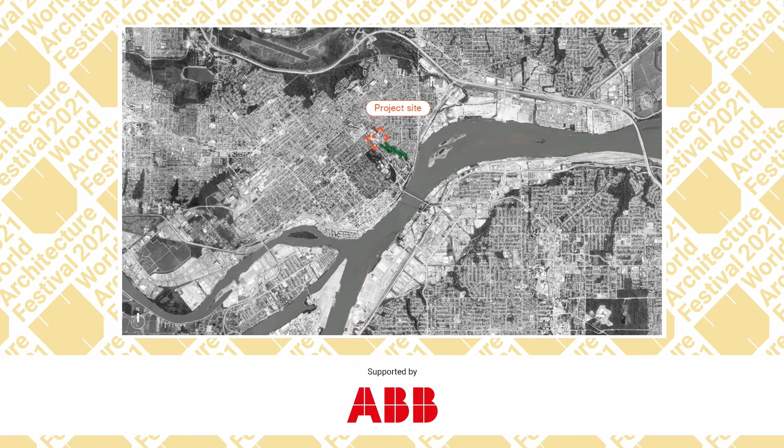The site here, you can see, is located on what was formerly a very significant land feature in the city of New Westminster called the Glenbrook Ravine, and that's just up from the Fraser River. And I say formerly notable, because as you can see here from these images, over the last 40, 50 years, that ravine was actually largely backfilled with garbage and leveled off and almost completely deleted from the landscape. And so our site is on the former headwaters of that ravine.

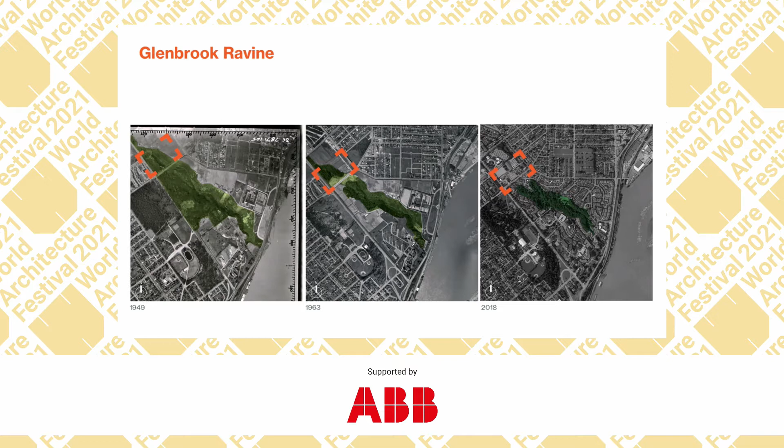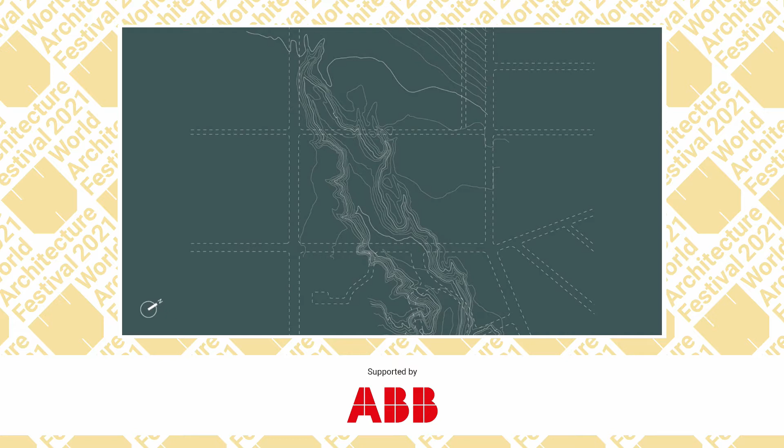You can see here the original topography that ran through the site that was largely leveled off and filled in. And then the urban or colonial structure of street networks and the urban grid that then surrounded it. And that urban grid notably is not oriented cardinal north-south, but it's on a slight skew to that. And so we took the position from a design standpoint that the building should take an attitude to this. And we took it off of the urban grid and oriented it primarily to that original topography as a way of reconstituting a deeper relationship with context and with the land.

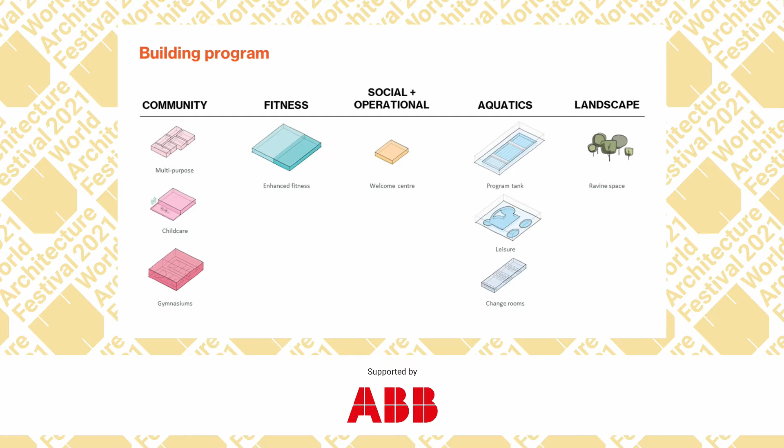So the building program itself is varied. It has both dry and wet programming. There's childcare, gymnasiums, multi-purpose spaces, and then a complement of both competitive and leisure-focused swimming. We started by iterating, trying to find a form that was comfortable for the site and unlocked the potential of both the site and its context.

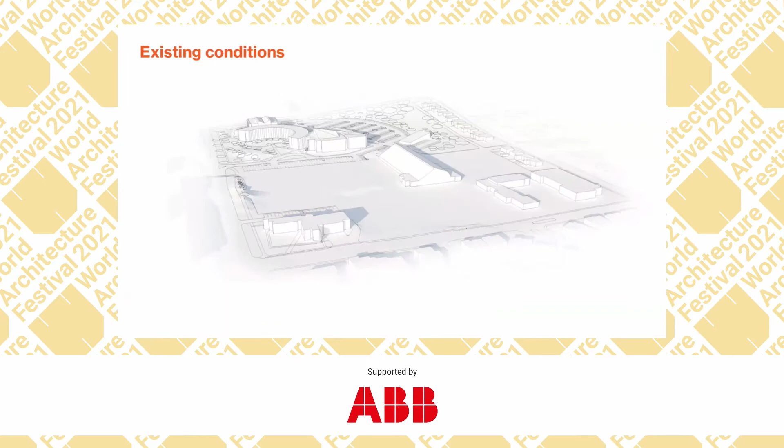And it wasn't an easy site. There's two existing buildings here highlighted in pink that needed to remain operational during the course of construction. And then the red dashed line here is a major sanitary line that runs through the site, and we couldn't build over top of that. And so the major design challenge here was creating an architecture that was intentional and had meaning, and that was not just the resultant of a series of difficult site constraints.

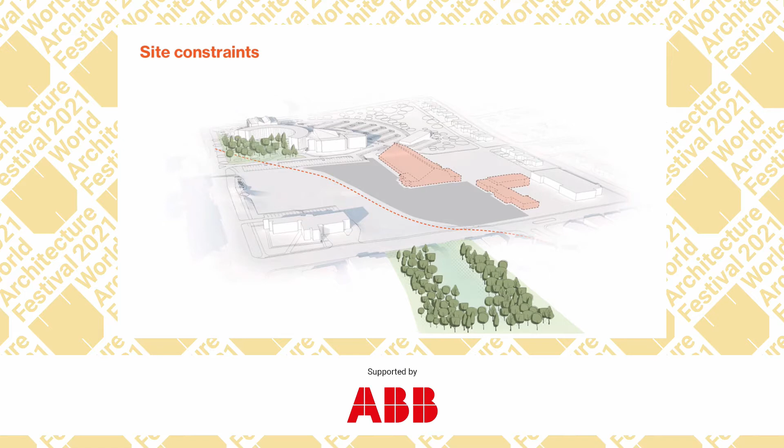So we started by using that sanitary line as an excuse to reconstitute the ravine. Not topographically, but as a major urban public realm piece that connected the vestiges of that ravine on both sides of the site and really allowed for a new site orientation and a site circulation and brought back the memory of that ravine space.

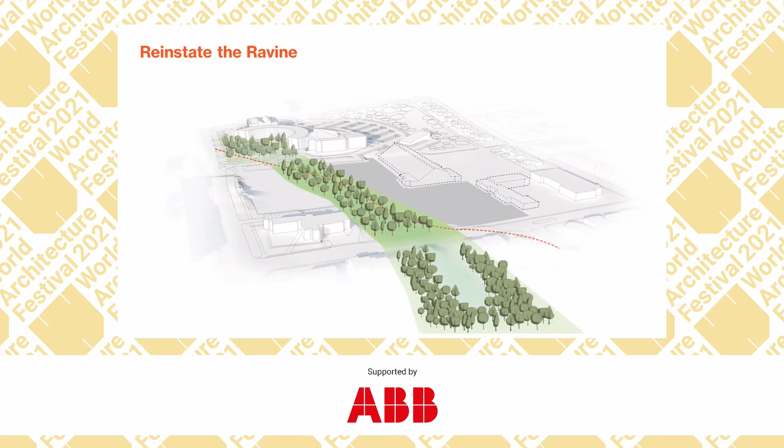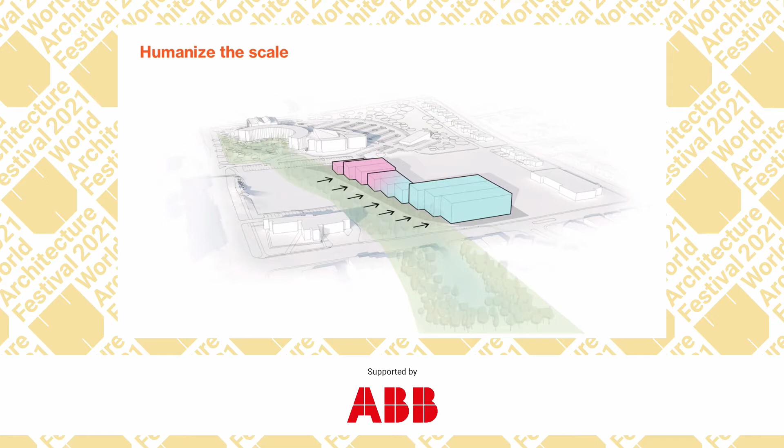The building program itself is really large and long, and we realized quickly we were dealing with a building that was of the scale of the city block. It wasn't an individual building so much as it was an urban block scaled building. And so we started to try and break that down and make sense of it, both to create a toothier edge that would engage more intimately with the ravine space, but also as a way of humanizing that scale and bringing it down.

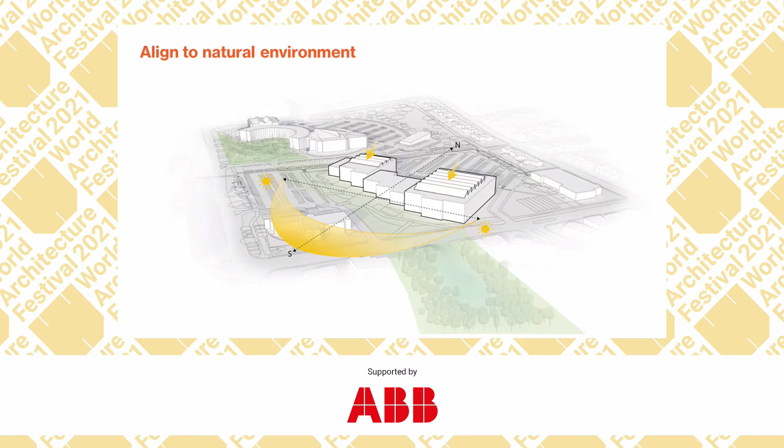The major move here, of course, then was to take the grid itself and shift it off of the urban grid and align it with a cardinal north-south direction. And that's both to orient it more deliberately to the ravine, but also to take advantage of this amazing north light that we can then bring in. And for aquatic programming, north light is extremely important because you can bring it in without fear of glare or affecting lifeguarding. And so that was a major shift. The building itself being a block long, we decided to take the approach that it was more of an urban planning exercise than a design exercise.

And so we broke it down to individual buildings within a building and gave each building a roof form that responded directly to the program within it. And then to give it some coherence, we created a fascia line, a singular line that wraps its way all the way around the building. And you can actually take your finger and trace that line all the way around the building. And the only place you take your finger off the page is at the lobby space, which is really the sort of social heart of the building and signifies entry and welcome and a special moment in the program.

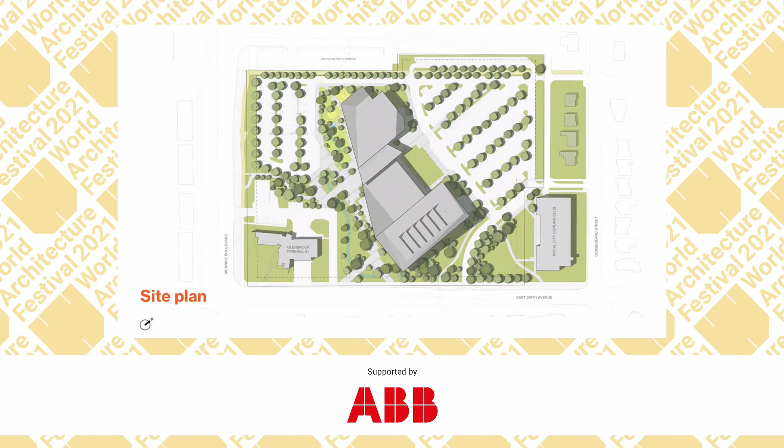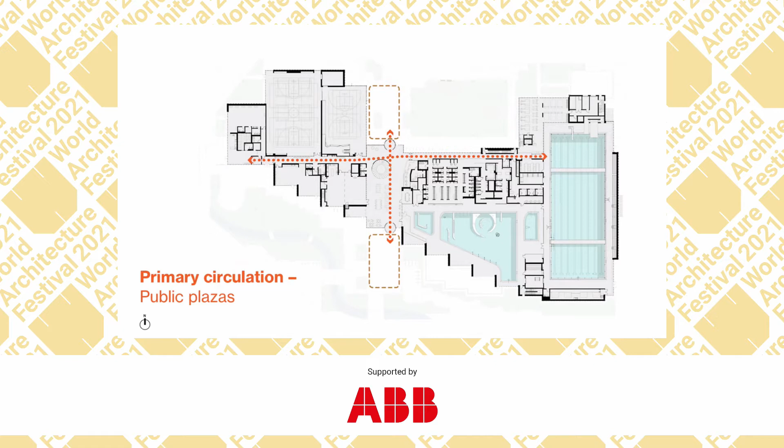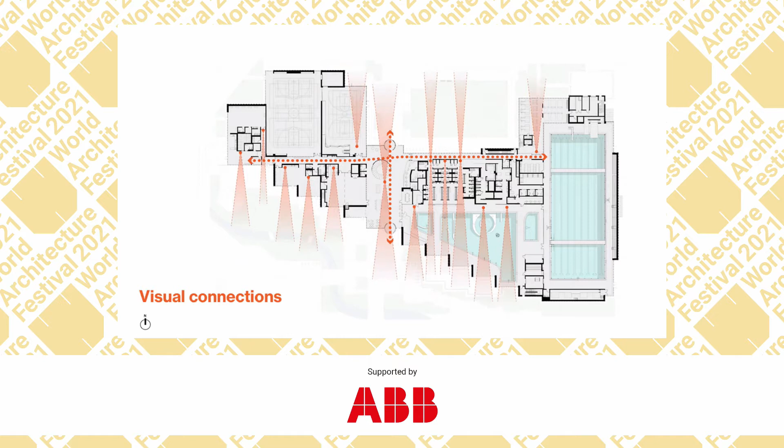And that takes you into sort of a cruciform circulation system that is highly intuitive and rational, but is intended to allow you to have views to that ravine space at all times. And so we oriented all of the major grid lines and structural elements in the north-south direction to unlock that kind of natural view corridors and wayfinding device. And that's consistent with the second floor as well.

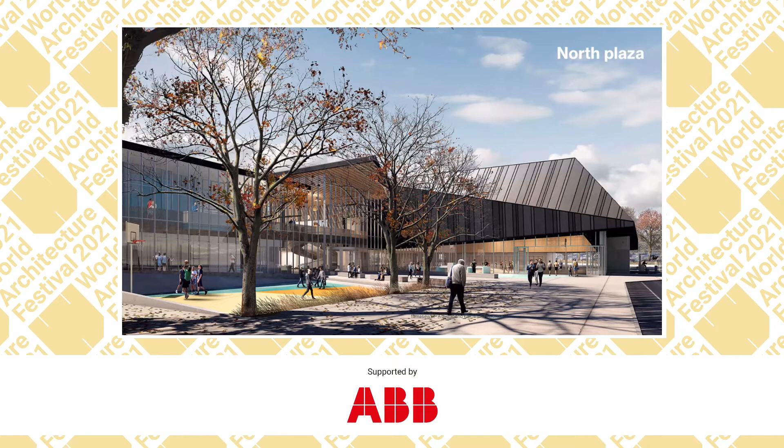The two different plazas are both different and unique. The North Plaza is more informal. It's, I would say, perhaps a bit more casual, and it's focused a bit more on recreational activities. And so there's an emphasis here on spilling the life of the building inside to the outside.

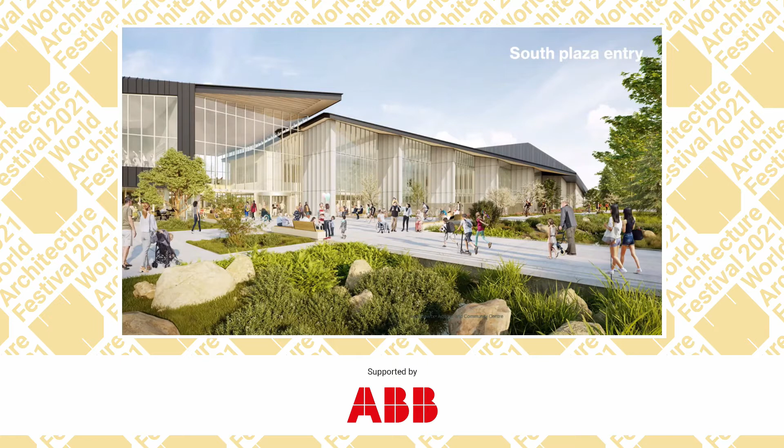And then when you transition over to the South Plaza, the feeling is very different. This is about a slightly more organic civic approach to the building, where you're passing through that ravine space. And no matter where you come from on this part of the site, you have to travel through that landscape space before you get to the front door of the building.

And then, of course, the calling card, the space that brings you to the site and brings you into the building, that front door, is the lobby space, the community living room, and we've highlighted that in a mass timber roof and a custom lighting strategy that will really highlight that and tell you where you're going on the site.

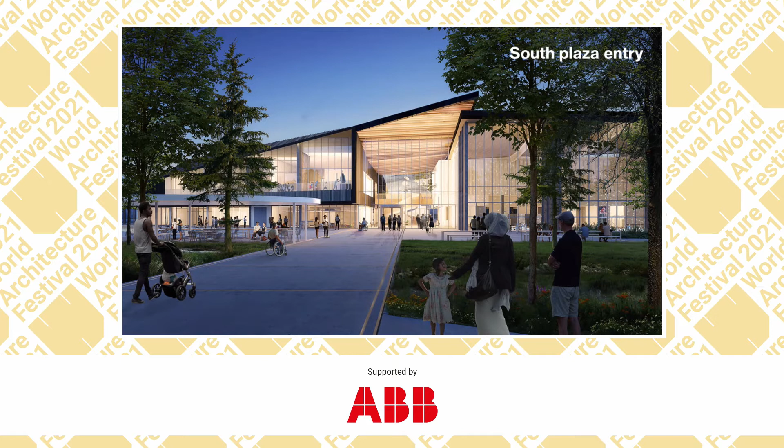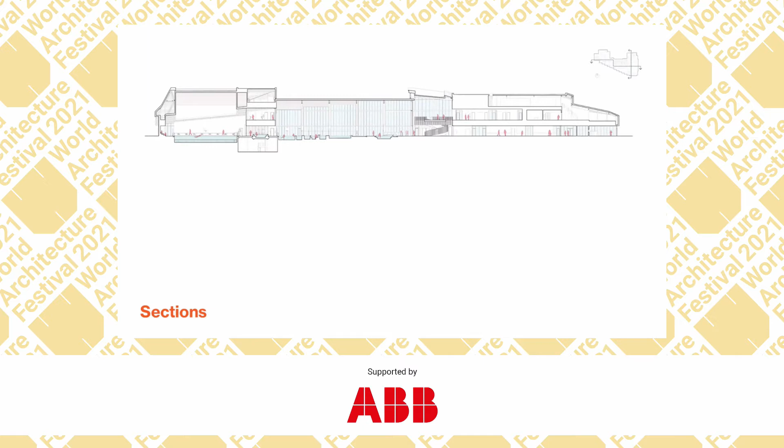That lobby space is intended to be highly flexible and adopt a wide series of programming options. It's intended to connect directly to the building programming on both sides of it and really allow that seamless transition inside to outside. This is a cross section here, and you can see through the length of the building how long that building is and that spatial variation that we tried to achieve with the different building roof heights and forms throughout.

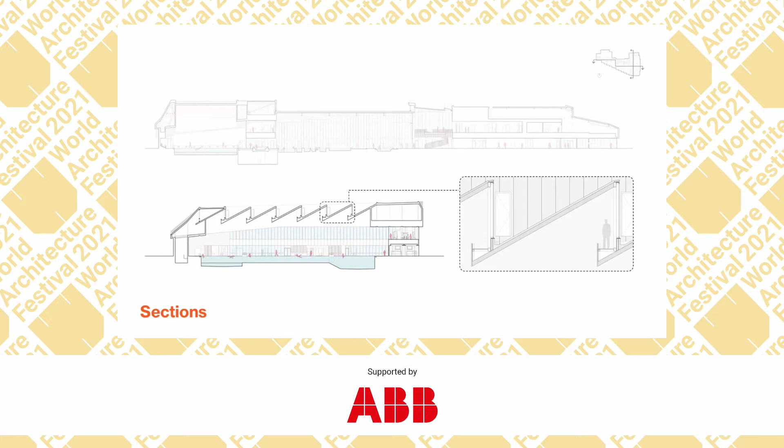The long section was really important to us through the lap pool. These are sawtooth roof structures, customized trusses that allow us to bring in the north light and hide and bury all of the electrical and mechanical systems in the depths of that truss, so we can light the entire lap pool without direct lighting. And so it's a very even wash of light, which is great for swimming. It's a great space just to be in as well.

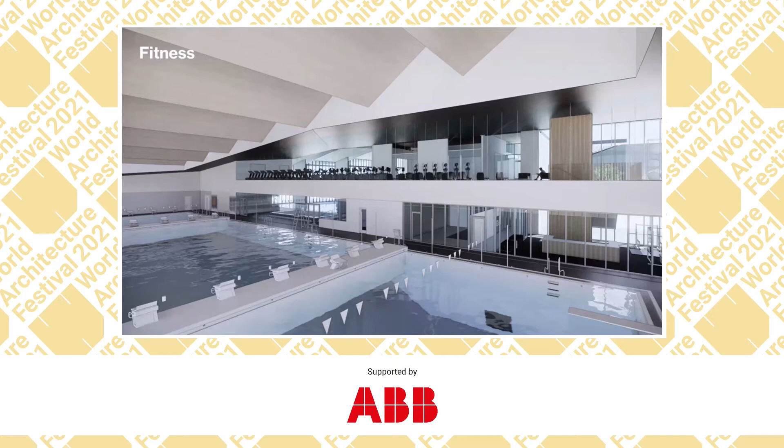The fitness space, you know, you go to most fitness spaces, they're sort of large rectangular open boxes, and we took a different attitude. We decided to push the fitness space into all the nooks and crannies of the resultant planning. And what that gives you is a very different spatial experience no matter where you are in the building. So one day you're on a treadmill looking at this view, and the next day you're looking at a very different view through the building.

The leisure pool itself was all about connecting people to the landscape, and really there's a series of large opening bifolding doors that bring fresh air and daylight into the building on the left and allow you to just feel like you're underneath the roof without necessarily being indoors.

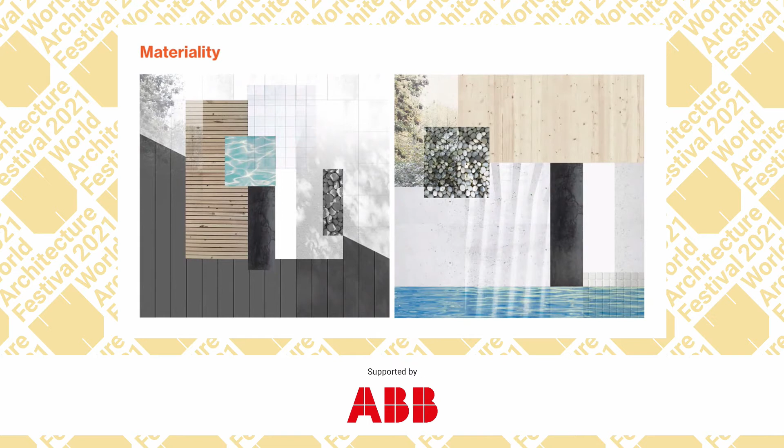The materiality, we were trying to balance a sort of civic timelessness with a warmth. And so that black and white palette is intended to achieve a more timeless quality, an enduring quality to it, representing an appropriate civicness to the site. And the wood, and water is, of course, a building element here in an aquatic center, adds that warmth and that touch.

We also broke some new ground in North America as far as how you clean water with minimal use of chlorine, and developed a whole campaign around this, around keeping the pool fresh and educating people on the connection between energy and water cleanliness.

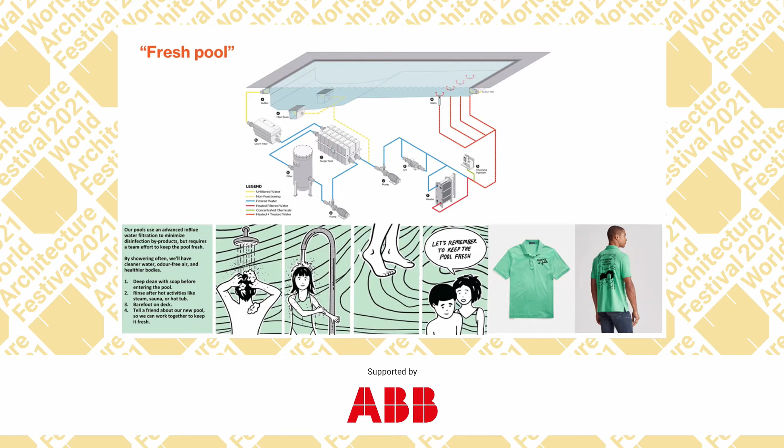And on the topic of energy, you can't ignore the sort of carbon and climate discussion these days. We're really proud of the fact that this will be the first zero carbon pool in all of Canada, and so it's completely electric, and it really changes the typology for this building type with respect to the climate conversation.

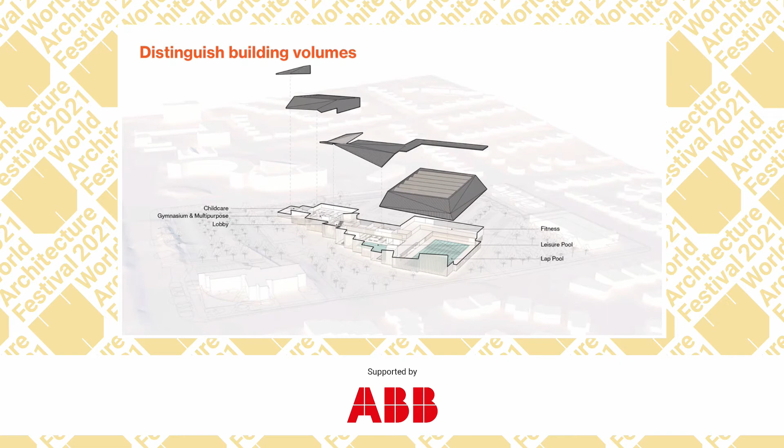Okay. Thank you. Ankur, would you like to ask a question? Yeah, you spoke about the two plazas at the edges of the building. I was just wondering, given the scale and the length of the building, are there other instances? How does the building interact at the ground plane level? In one of your views, the portals kind of open up to the greens. That's evident, but in the other spaces, how do they interact at the ground plane with the expanse around the building?

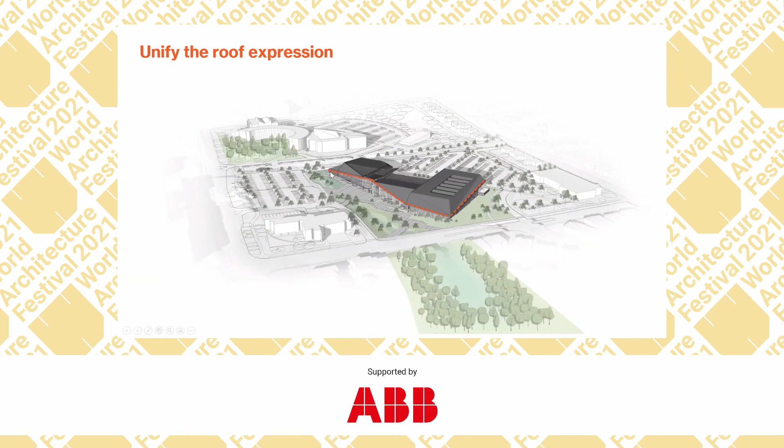Sure. Yeah, I can take you to a couple of views here. In this view here, you can see there's actually a datum line that's established on this volume here, and you can see it here. So that black volume cantilevers out over the ground floor and creates sort of spatial alcoves within that sawtooth ground plane.

And so there's large openings in most of those rooms. Some of those are multi-purpose rooms that want a relationship with the outside. Some of them are just closed off or don't have that direct connection. But it's intended to create these sort of micro spaces underneath that larger black volume that are more appropriately scaled.

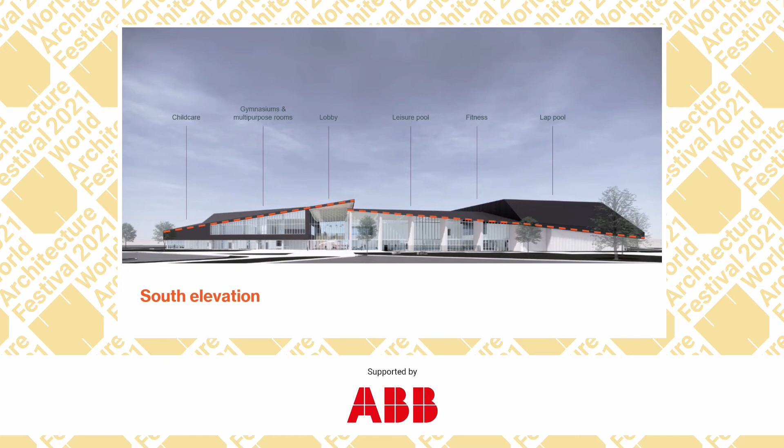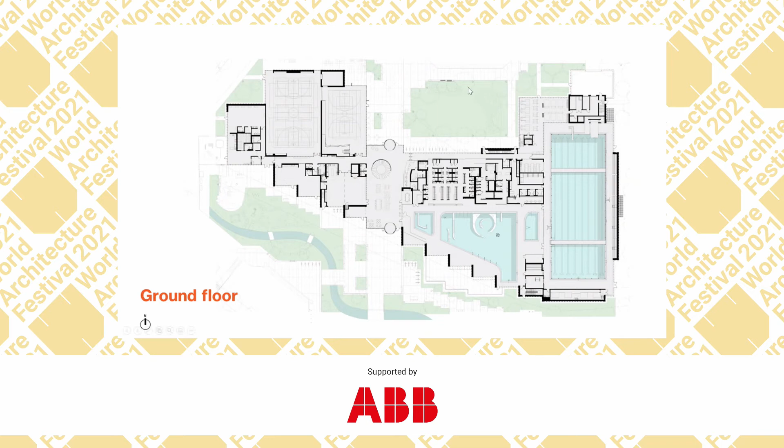So we're trying to, at key moments on those corners, bring programming out to the edge of the building that will activate that part of the building and give you eyes on the surrounding public realm. On the north side here, and maybe I'll just skip ahead quickly, you can see the whole notion around that smaller gymnasium is really intended to open up, and there's large folding doors there as well that are interacting with that outdoor plaza space. So that's some of the ways in which we're trying to engage at that ground plane level.

When one looks at the perspective views, you see that the architecture is all the time trying to pull it back together. So it wants to be particular, but then it wants to be a total object. And that's very difficult, I think, to control. So you have these sort of linking eaves, sort of bumps over the top, and then you pull it together, and then you repeat things.

And I noticed that the fins that you get in plan are sort of also caught between the two geometries somehow. They're ordered to one geometry, but the edge that they make is actually another geometry, and they're sort of running between the two. It's a question of grain, and it's also a question of, I think, large buildings: once you do break them up, the question is how much do they cling on to that is common. I think it's a tricky one, and I'm not really so sure you've completely resolved it.